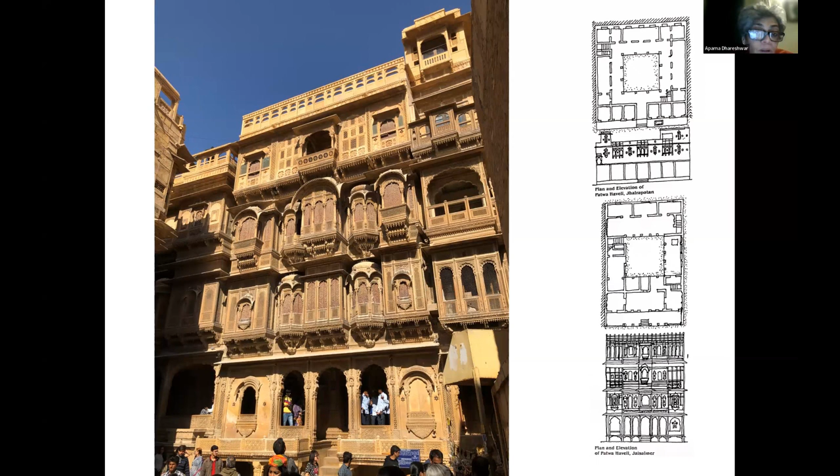And we borrowed very heavily from this historical prototype or archetype that is available to us. This is a diagrammatic representation of a Haveli, where, as you're able to see — Pedro, are you able to see my cursor? Yes, okay, that's perfect. Okay, so this is a typical plan, an evolution of a plan which we imagine might have developed.

Where you're looking at a rural house and how it went from coming together to forming a courtyard, a central space in the center of the house with all the rooms on the side, and how here you have a single courtyard and all the rooms along the edges, and how it develops into a slightly bigger mansion where you have multiple courtyards of varying scale. And this is a quintessential plan of a Haveli from centuries ago, perhaps.

And a lot of these Havelis still exist. To give you an image of how it might look, this is how a Haveli might look from a slightly higher level. These are, of course, addressing the issues of being in a geography where the temperatures are extremely hot. This is a desert region, so this is the general context of where the project was located. And we borrowed very heavily from this context.

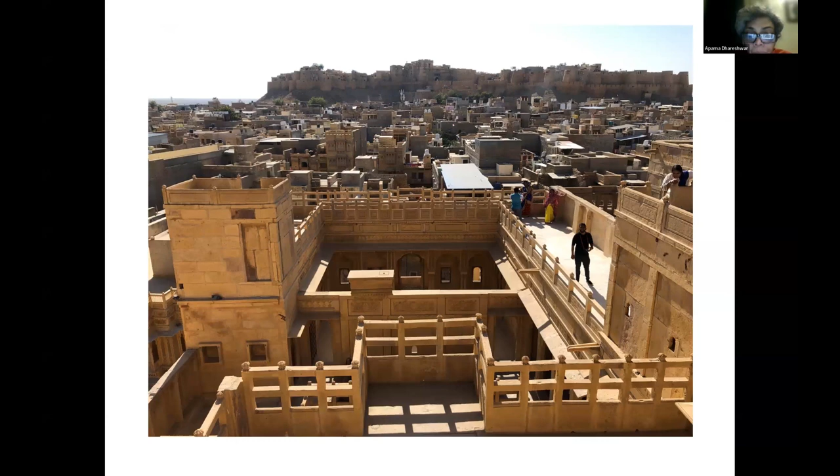The interesting part about the project was that it was not only student housing, it was also that the owners of the student hostel wanted to stay on the upper floors of this structure. So it was a hybrid program where you had slightly public program on the lower floors, and private residential levels at the upper.

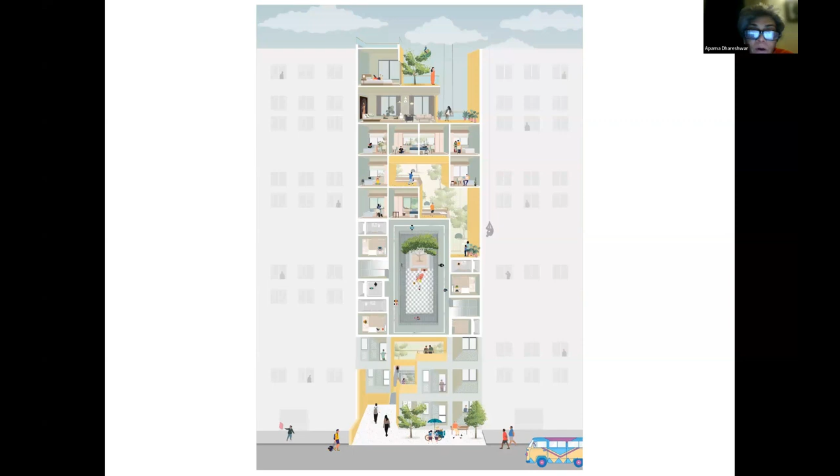So in a nutshell, this is the program: a mix of public housing, student housing, and private housing at the top. You're going to have two structures on either side of your land, and this is where you're going to squeeze in your program.

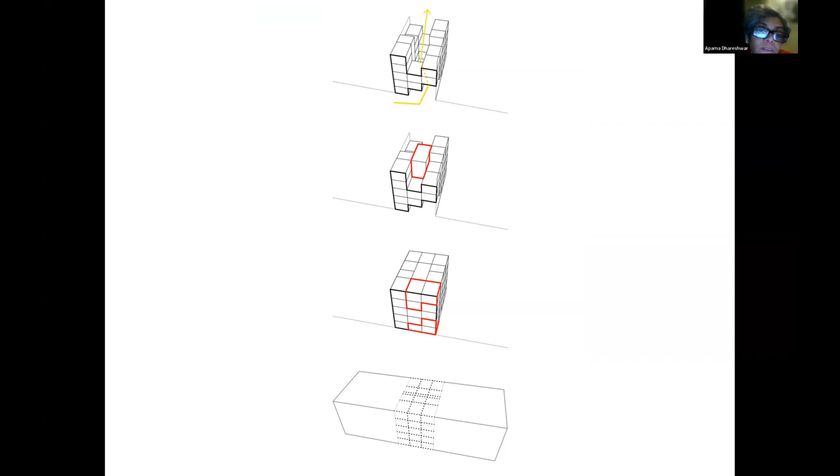So what we did was we said, okay, how can we scoop out the center and create multiple courtyards, making this structure a little breathable, a little porous. We scooped out these volumes that you see marked in red.

This is the section through the program that we eventually developed, where this is the roadside on the right. You enter the program here and come into this multi-level courtyard open to sky. You have all these rooms flanking the courtyard and looking into it. This is an open-to-sky courtyard.

What happens on the top two levels is the private residence of the owners. There's a little bit of a small basement here, slightly subterranean, so you have some trees growing in there.

So what we effectively created was, instead of having a structure open only on two sides of the land, we scooped out the center and allowed the rooms to breathe in from all sides. We basically created a typology where the student housing could have a courtyard right in the center, and not a block of building with no ventilation or light.

So this is basically the section. Natural light, ventilation, and social spaces were very critical for us to introduce into this project, because when there is a high risk of failure for the students, we felt the community could garner together and develop a sense of community, a sense of belonging, a sense of support. The architecture was primarily worked around that idea, how we can help build a community for the students staying so far away from their parents, under great pressure, studying 6 to 7, sometimes 12 to 14 hours a day.

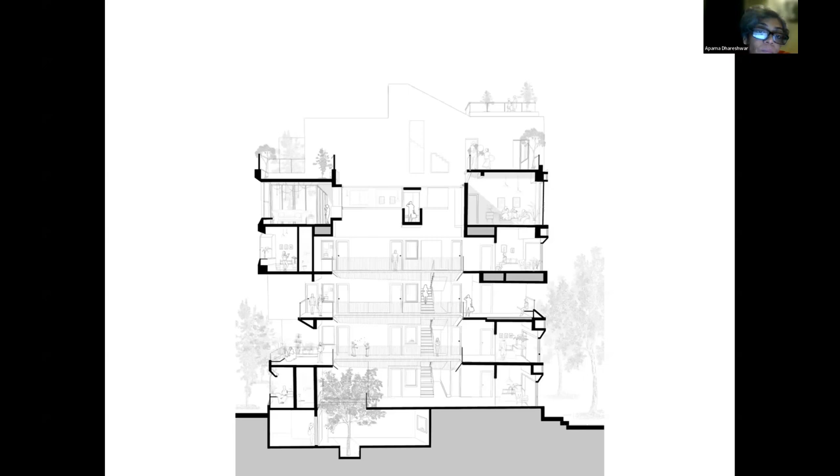The Kota Hostel is a small beginning in reimagining students living in the town away from their parents under pressure. These are the plans. You basically have the road on this side, and there would be a structure on this side.

When we completed the project, the structure on the left had not been done, but the structure on the right was already in place. So we began by building our own wall on the left-hand side and built this entire structure. But within a year or two, this structure will also come up, so one has to assume there will always be a blank wall here and here. From the road, you enter in here. This is your central courtyard, and these are all the rooms on the side.

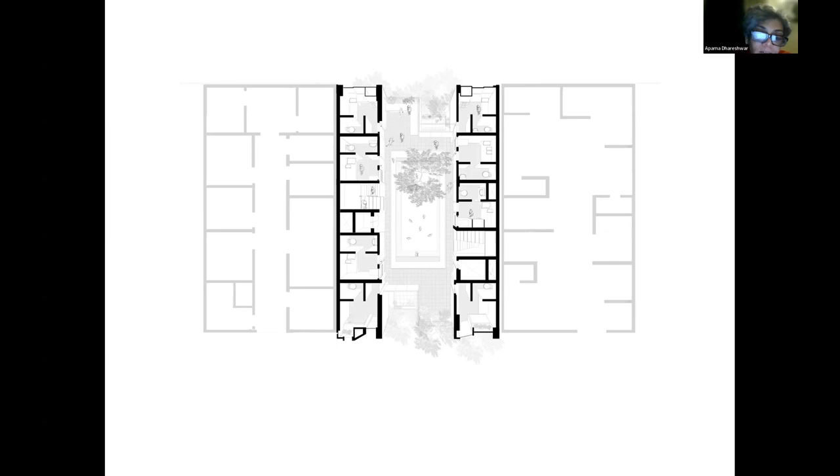This is on the upper floor. These are the rooms with their attached bathrooms and washrooms. They all look into the courtyard, so at any point in time there is huge visual connection between all the students. There are also cutouts that connect you vertically in the section, letting you look up and down, creating a great feeling of openness because of these multi-courtyards across the section.

We have also borrowed the materiality of stone and created these little facades, little jalis. They're called jalis in the local dialect. A jali is a screen, a perforated screen made out of stone, a very typical traditional vernacular ventilating tool. When air flows in through screens of stone, it naturally becomes cooler as it enters the room, so that's the element we picked up.

So these are all your hostels. You have levels 1, 2, 3, and 4, which are all your hostels, all your student rooms looking outside, and then you have the upper two floors which are owner-owned. These are some images of the project.

The use of color yellow is again borrowed from the local context, it's a very popular bright color, which we wanted because we wanted to create an environment that is bright, open, and airy. As you can see, there's a lot of light, but it will also allow a lot of air to circulate and hence cool the rooms.

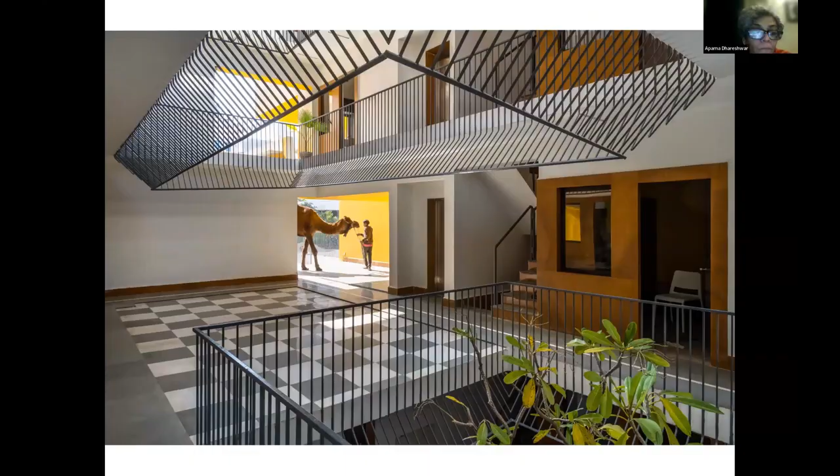Again, some views of the courtyard. This is the courtyard that is open to the sky. The bridge you see here is on the level belonging to the owners. The open-to-sky courtyard is spanned by this bridge, and it connects the two arms of the residential unit for the owners.

Just to conclude on Atam, the meaning of Atam is intimate. I don't know if there's a direct translation for that word, but it could also mean soul, like S-O-U-L, soul of a person. In this context, intimate is the correct meaning, and that's the name of the project.

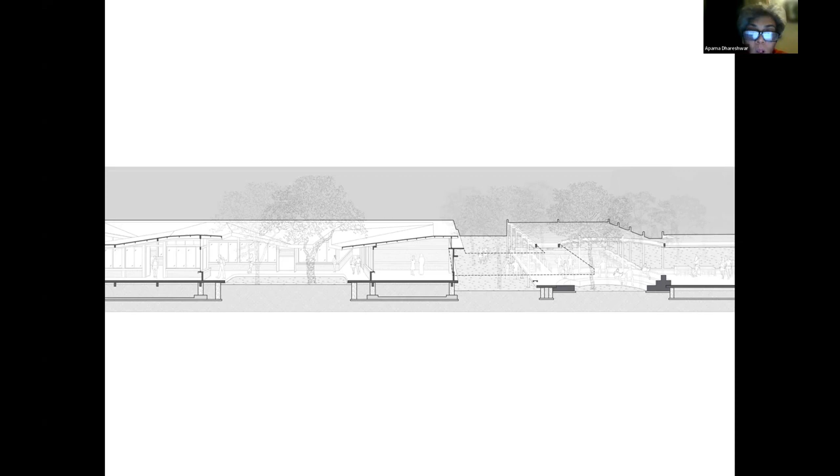So what happened was that there was barely any footprint of considerable scale that would allow us to make a food court or pavilion for them. So the next slide will show you how that is.

So what we did was we built around the trees. This was a big tree. The structure you see here is an existing tower on the campus, about a 6-7 storied building, I don't remember exactly how many levels. So this was an existing building, and there's a little one on the side which you can't see here, which we had built as an extension. And this was the third structure that was going to come in.

So the dining pavilion connected the tall tower along to the labs, which you can't see currently in this picture. But it was a pavilion, so it was an open structure. The whole idea was to make it very light, a space conducive to the children coming in, eating their food, taking a break. At the same time, give them shade, make sure there's enough light, protect them from rain, and allow for spaces where they could congregate and have events. Again, you might find a common theme that we always have this central courtyard or congregational space for people to connect and bond over.

This is designed in a locality of Mumbai called Sion. The student dining pavilion is basically a partially open space. It exists as an extension to the indoor cafeteria, which is where, if you can see my cursor, that is the extension. It is designed with primarily three objectives in mind. One, it serves as a dining area. Second, it creates a physical link between the site's existing building. And it was also to contain a brick amphitheater.

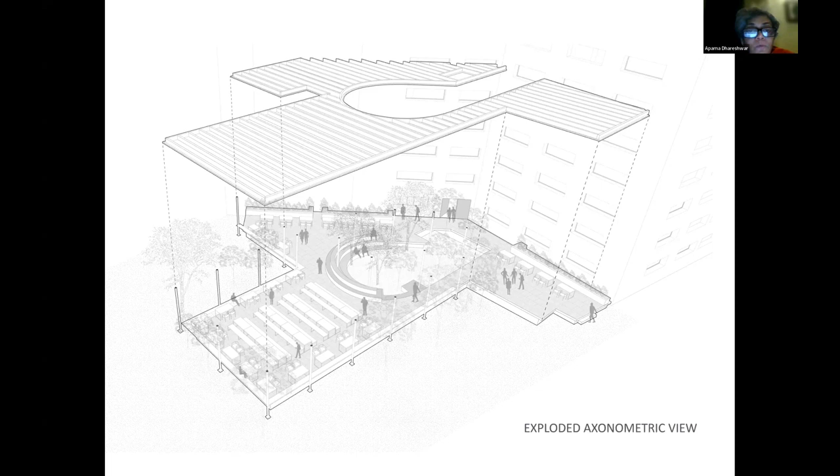So this brick amphitheater that you see in the center was created for informal gatherings. The central structural or architectural pin that holds the whole project together, if I had to pinpoint, would be the structure of the pavilion. So you have this beam structure held in place by peripheral circular columns.

So this is a view. The entire pavilion is held together by these circular light steel columns. What we did was use that structure to build our seating, so the cantilever fixed seat is fixed to these columns. The column also serves the purpose of holding light, so your uplighters and downlighters are fixed here. The beam naturally also holds the roof.

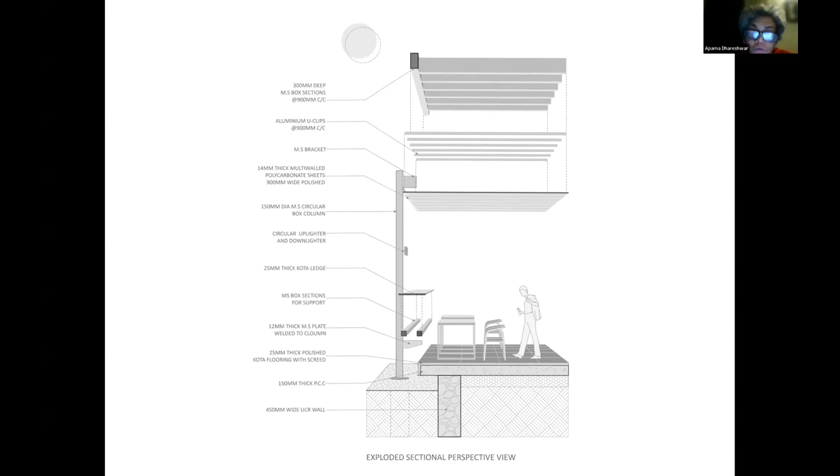So this column is the central feature that holds the whole project together, where the seating is fixed to the column, the lights are fixed to the column, the roof is fixed to the column, and there is an extent - it's slightly off the plinth, the plate that holds the pavilion. So there's a disconnect between the structure which wraps the entire plinth that is weaving primarily between the trees, which you will see in the following slides.

So this is the column I was talking about. You have an entire array of steel circular columns around. There is a beam here which holds the roof. There's this light polycarbonate roof that floats over this plinth, and this plinth is primarily weaving around all the existing trees on site. So in a nutshell, this is how we envisaged the project - the trees guided us in terms of how we want the pavilion to be, and the roof and footprint of this pavilion is completely contextual to this site.

This is the brick amphitheater that you see in the center here. This floor plane is a continuous platform, and here, this is an overhead - you see this translucent canopy supported by these slim circular columns. And like I said, the lighting you can see here is integrated, it's part of the structure.

The roof plane - we purposely put the structure on top of the polycarbonate, so when you're sitting down, you're not really seeing the beams running across. They're not very loud, so it gives an appearance of the polycarbonate kind of floating over your head. And it's a pretty surreal experience because of the trees - the shadows are always shifting. The way the roof is envisaged is always changing at different times of the day because of the light and shadow play.

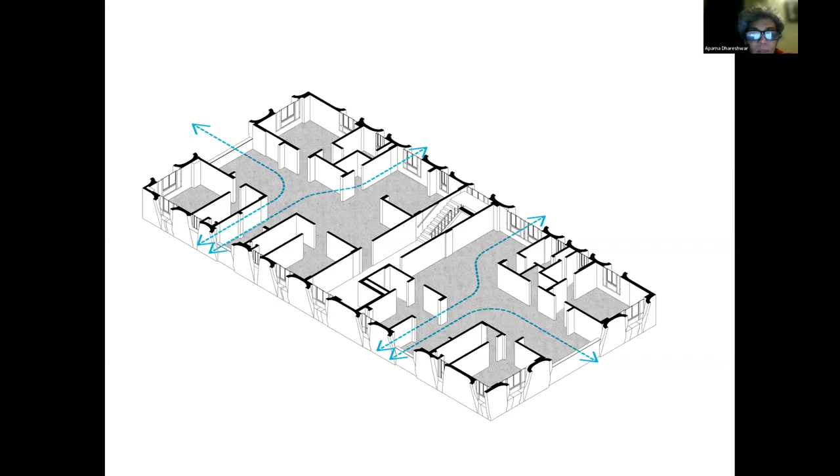This is another view of the plan. You enter here and there's a central hallway which leads to two apartments on each floor. As you can see, we punctuated the apartments with these two balconies - two punctures on each side. And you can see a lot of windows along this facade because the views around were so interesting.

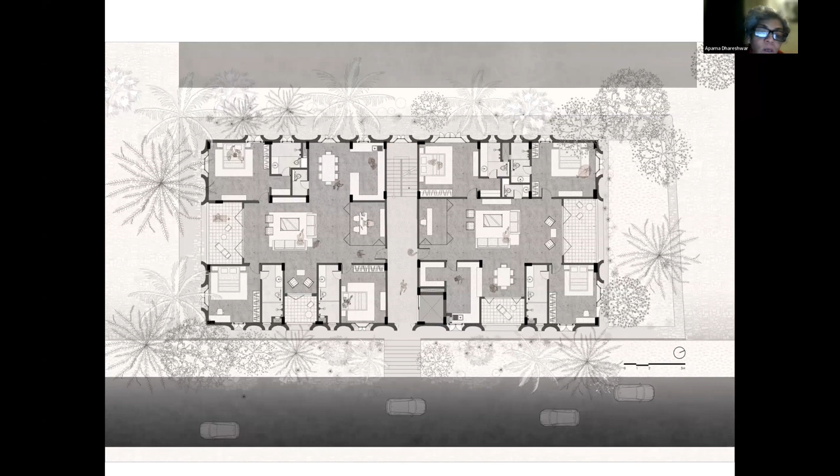Pedro, I hope you can see the GIF.

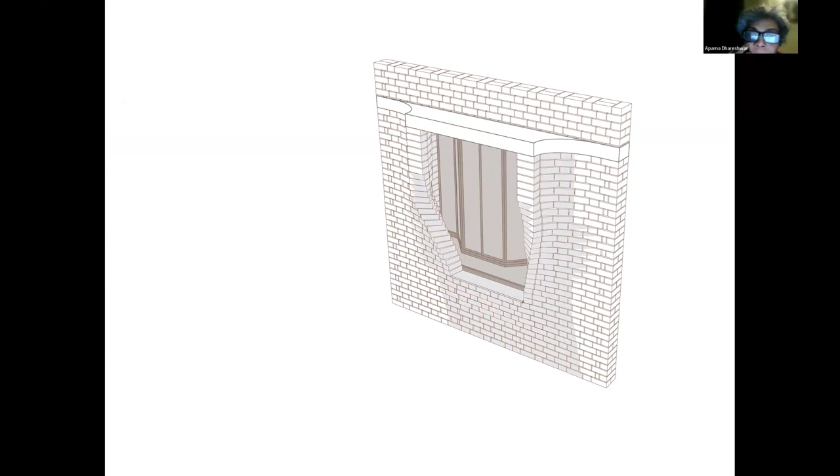So the second point of intervention was the building skin, which comprises walls and horizontal sun protection, because it's again a very hot city. Working with master brick masons from Pondicherry, a city in the south of India, we designed a wall system made from 9-inch thick brick walls that corbelled to carry the load of these stone-faced lintels, or chhajjas as they're called in the local dialect.

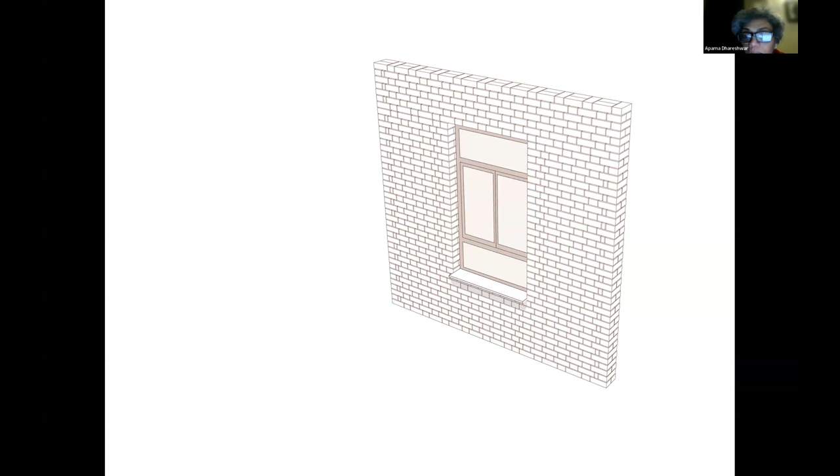Glass bay windows are recessed, set into the opening, so they give you shade. At the same time, we're looking at how the cantilevered stone-faced lintels can add a formal accent to all the windows.

These were the different modules. We work a lot with scripting and do a lot of parametric modeling. We use Rhino as our main software, with plugins, and worked on a lot of components to create these modules.

As you can see, this is the formal development of the windows - this is the sunshade, this is the glass. We corbelled the edges of the fenestrations to give it more form. We worked on the fenestrations primarily, formally, because that was the only intervention we could make for the project.

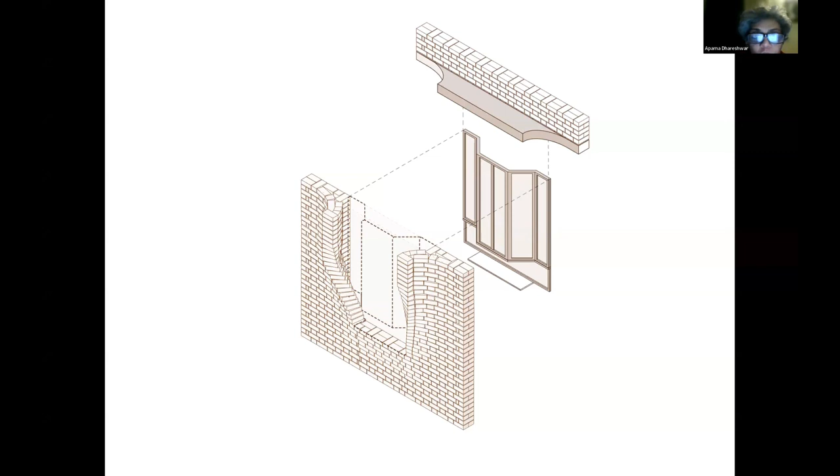To ensure the structural integrity of the wall corbelling, we designed these wooden templates. The way each brick was twisted was designed by working with the masons, and we made these molds which were then used by the brick masons to lay the courses of bricks.

We do a lot of this collaboration where we are keen to learn and work with craftsmen, with people who are actually working with their hands, while reinforcing that craft with cutting-edge technology in terms of software and structural analysis. It's a fantastic combination of using the craft and intelligence of your craftsmen, your existing resources, along with the latest technological tools in your studio. This project is a perfect symphony, an example of something like that.

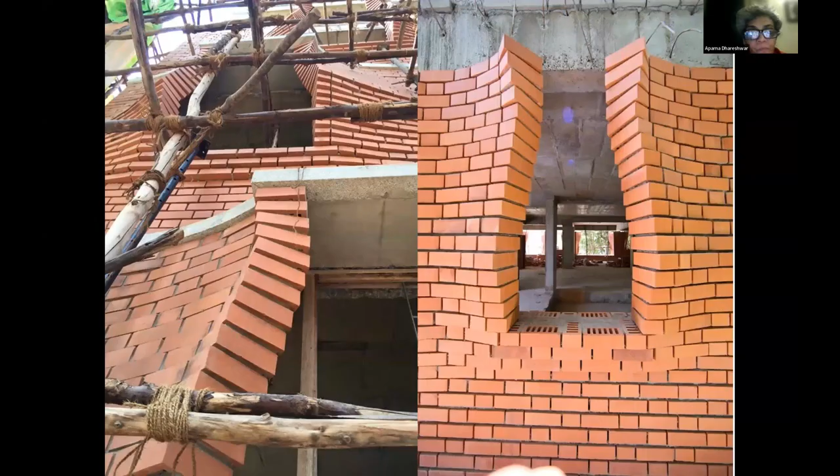These are construction pictures, and you can see how the molds might have been used to create these sort of edges for all the openings. And this is the finished building facade.

The project is called Sienna, naturally, because of the color of the brick. We've taken the name from the color of the materiality that we are using. So this is Sienna.

We move to the next project. This was a factory project that we had been commissioned to do, again in an extremely hot site environment where the site was completely surrounded by these metal sheds, metal warehouses, very opaque, heat reflecting, light reflecting context around on all sides of the site.

We were really looking to see what we could introduce in the project that would help break that opacity, the harshness, the materiality, the almost characterless site context that was existing on the site. The project was a factory. I will run you through more about it in the consecutive slides.

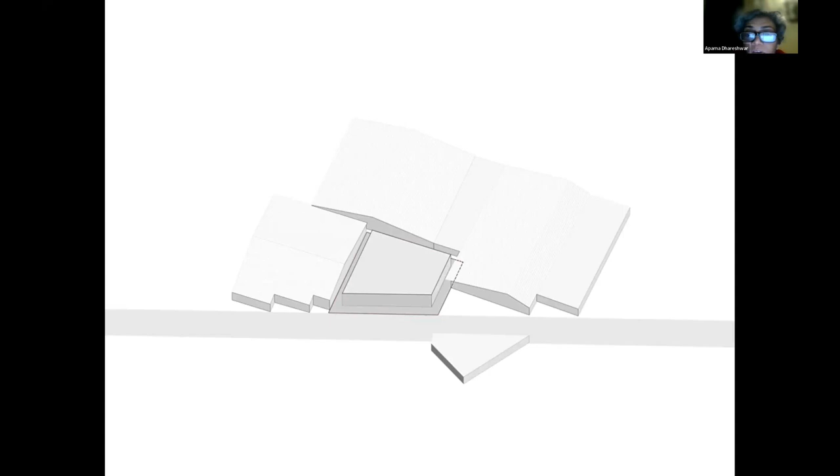It had a slight irregularity, it was not a perfect rectangle. This is the road, the approach. Rather than its surrounding structures which were opaque and created this really hard edge with the passing road, the endeavor was to enter into a more open dialogue with the context, and we created that by opening the concrete facade.

You see in this view that it's like a concrete block, and we opened this building by taking out some of the mass and opening it out to the road. You will get a better idea in the following slides.

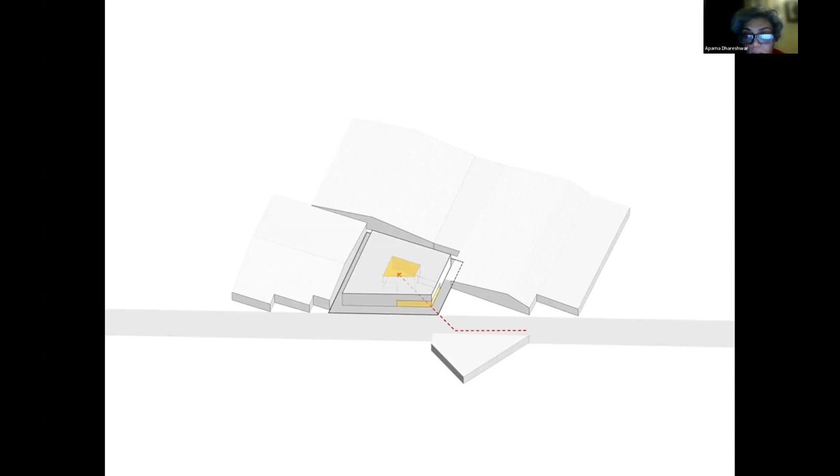So this is the concrete mass that we did, this was a massing exercise. What we did was we scooped out this entry part and opened out the building from the inside, looking out onto the road. We opened out this corner, opened out the center.

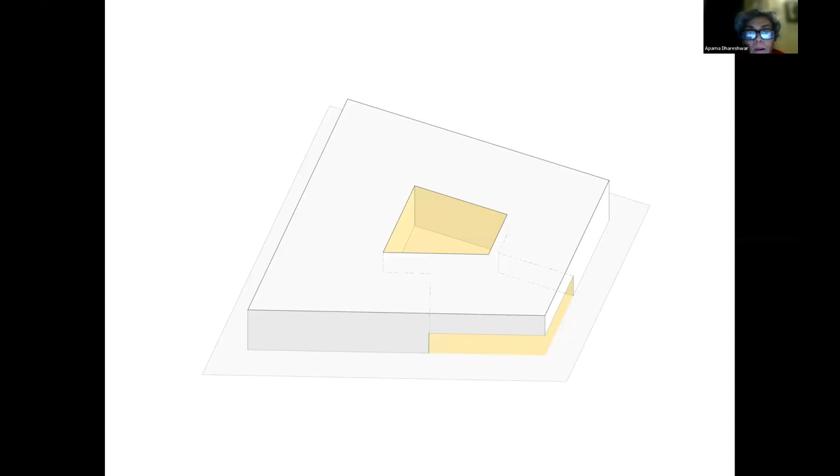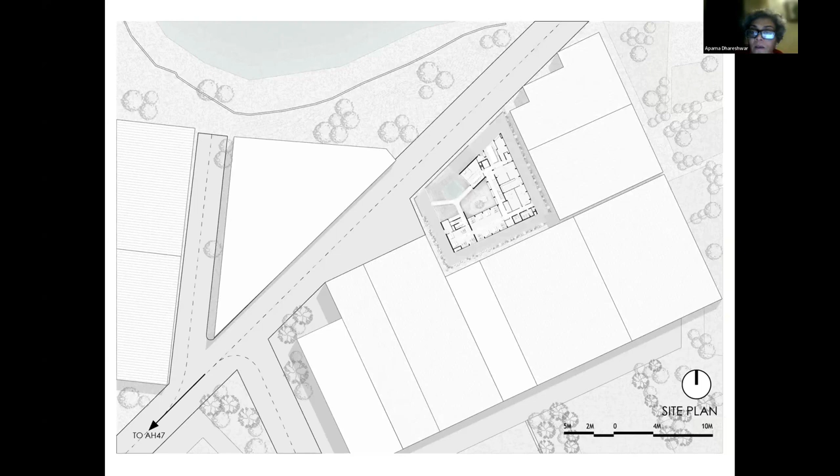It flanks the central courtyard, and we literally took out this corner from the massing. This is a more zoomed in view of the ground floor plan.

So this is the road. You approach, you get into the building from this bridge. What we did was we scooped out this land from there. There was already a contoured land, so this was its lowest point.

So we built in a reservoir, like a pond, here, and introduced some landscape element, connected it to this courtyard, which was a spill out for the people working in here.

So you entered in from here. There was admin, there were all these administrative offices, facilities here for the workers. This was their equipment, their machine rooms. This was also a factory here. This is all on the ground floor, so it spills out at this level.

And you could also, if you want to take a break, go down these steps where this body of water had been created. I will talk more about this part in the consecutive slides.

So this is your first level, which is at ground level. This is your upper floor, which looks into the courtyard here. And you have a terrace, which is the roof of the lower floor, again looking into the courtyard. At the same time, you're opening out the views from this arm, which was a completely glazed window through which you could look out.

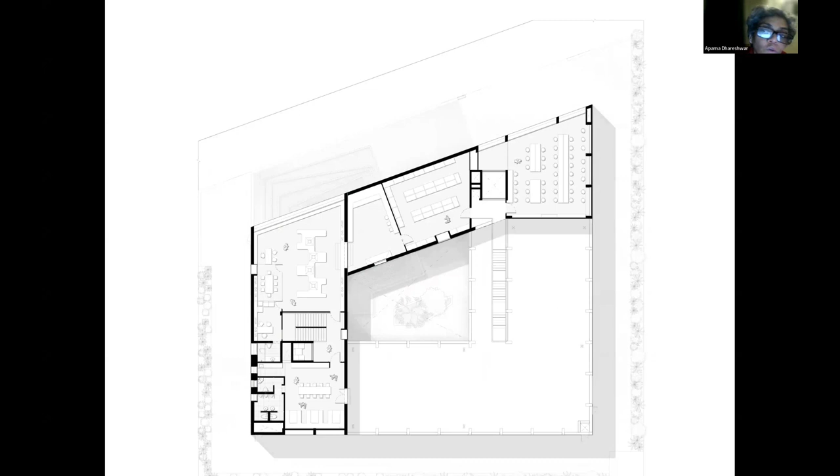From the ground level, you could go down to the naturally contoured lowest level on site that we already had. When we initially went to see the site, this was actually filled with water, and this little pond was used to wash buffaloes roaming around the area. It was really like a bathtub for the cattle. So we retained that contour, and said we'd still try to see what we could do through rainwater harvesting or collecting water, and we left that pit on site and built around it.

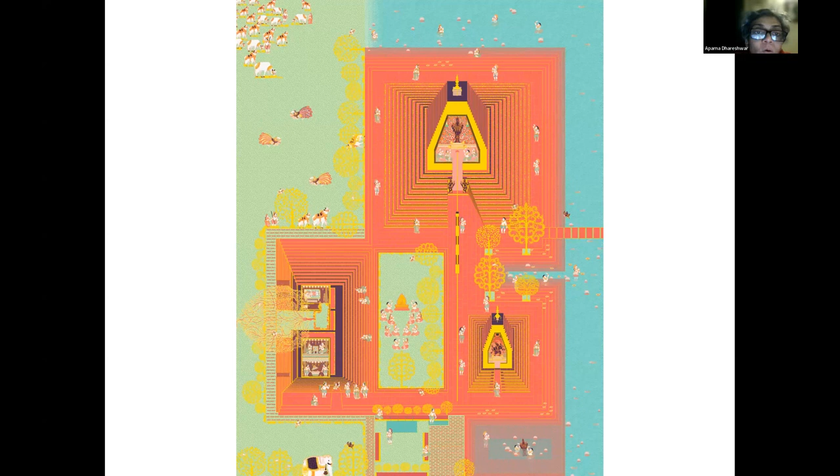This is a miniature prepared in the same artistic style of the local textiles and local art created in these villages. And in that same style, this is a representation of the project, where these are the two shrines that you see, and this is all water around that.

And this is a small enclave for the priests and for the kitchen. Then there are these smaller ponds, and a little bit of greenery around here. So this is just a representation done by our design team, carrying forward the art that is available in Nandyal.

The brief was to design a temple for the residents of the villages in an extremely dry terrain of Nandyal. So the main concern was to provide a space which would marry the socio-cultural expectations of a temple with the ecological framework and dynamics of the site.

The negotiation of land and water with steps is a significant part of India's architectural heritage, as seen in the ghats of the city of Banaras. I'll show you what ghats mean. The planning of the temple itself was based on a 10th century temple of the same deity, called Tirupati, so there were very strict guidelines given to us, laid out by the priest who would be part of the temple complex.

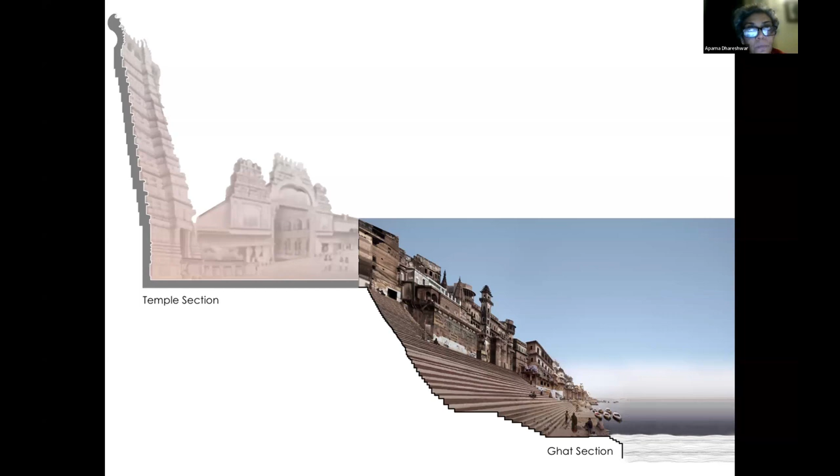So though we don't have a river, we're going to reimagine the temple that is typically set on riverbanks. That was our strategy. These are the initial sketches we were looking at.

Kund is the local term for this negotiation of land and water, where steps keep going underground and become a reservoir. They hold the water, but the same form continues to become the steps. This is a very typical Indian architectural feature called kund. So we said we'd have a kund on either side of the temple, with the temple almost rising out of the ground. That was our basic idea.

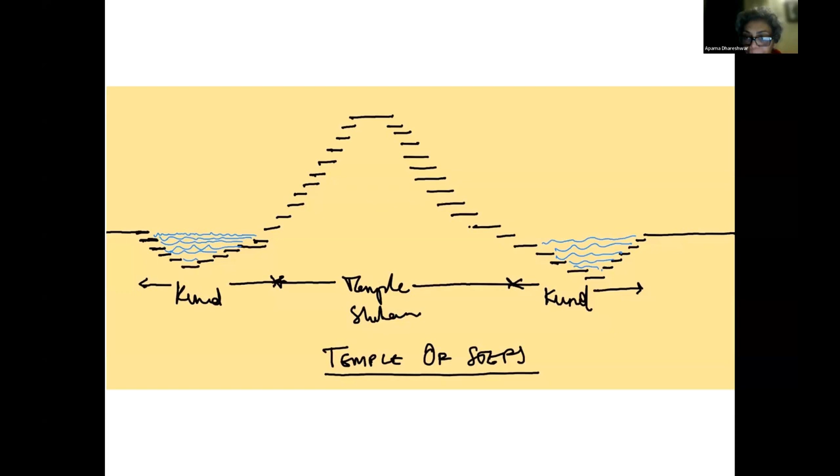It's not just people sitting on the computer imagining it through digital models. We also do physical modeling with paper, wood, and different kinds of materials, even concrete models. A variety of materials are used, and that's an important part of our design development.

These ghats or this kund that you're looking at, we imagine this was a central idea to this project. We imagined that these flight of steps leading down to the water body would be abuzz with people who would use it for their bathing traditionally, washing their feet, washing their hands, cleansing themselves. So water is a very important element when you're visiting the temple.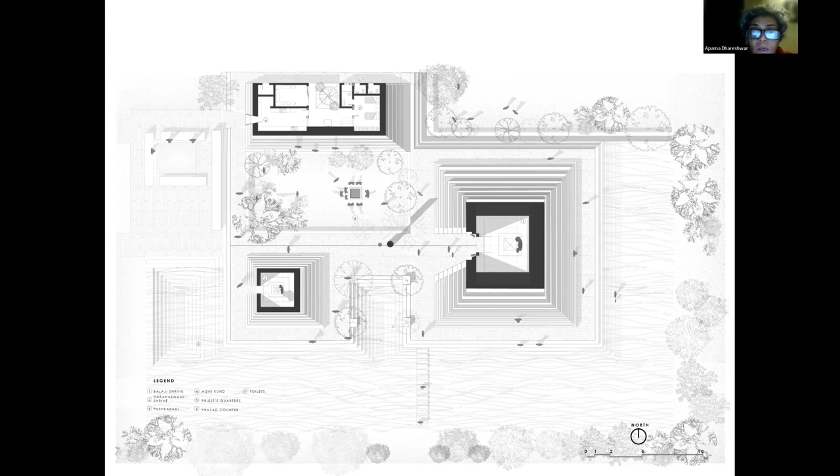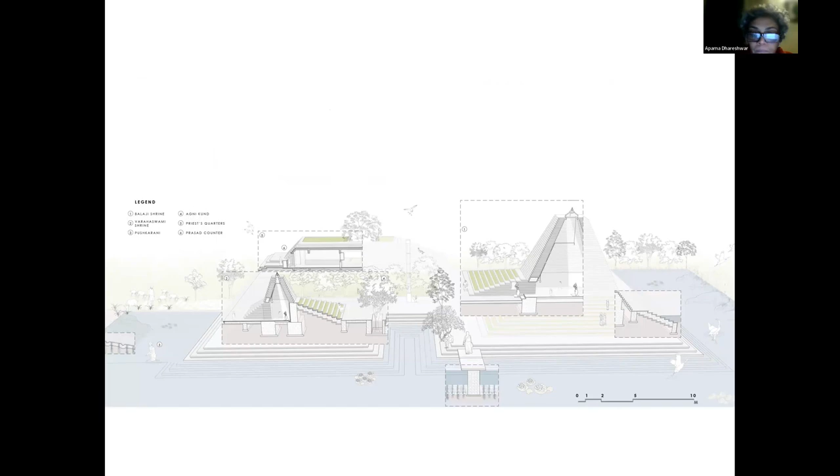This is a bird's eye view of the built project. This is the main shrine. This is the water body that you see on the side, created with the wastewater. This is again a space left open for the villagers. Many times they have functions where they need holy fires around which people will sit and perform religious rituals. So we've given them a space for this.

This is the smaller shrine, and under these flight of steps is housed the kitchen and the priest's residence. The cement plant, which financed this for all the villages in the vicinity, is here in the background. You can see there is a village out here, and a village out here. This is the main road that connects them. So they all drive in from these roads, and this is like a driveway. As you're approaching, you're always seeing the shrine at the end of that road.

This is an east-west axis. This is the pond that we built. This is the smaller shrine, and this is the priest and kitchen's enclave. More pictures of the same.

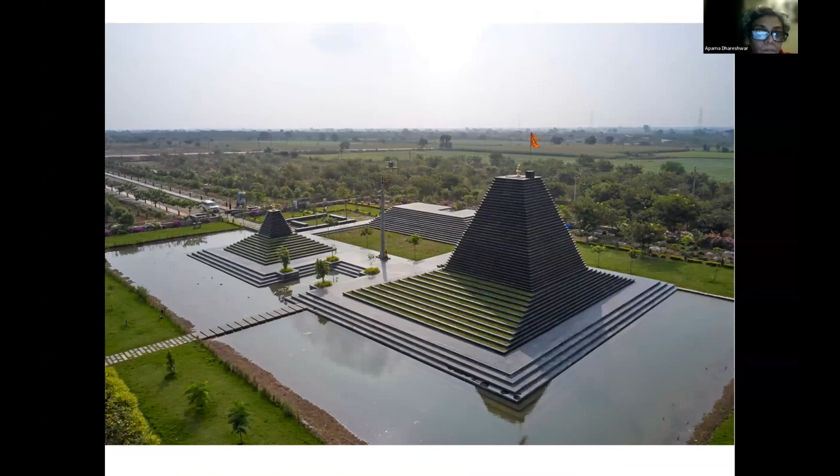This is an Indian priest. Typically you will have women decorating the shrine. This is black limestone, local limestone that we used. So we just basically corbelled the stones to create the temple.

This is when you're coming from the east-west axis that I showed you in the previous slide. This is what you would see.

So this is the central idea of the project, where we are negotiating land and water with steps. If I had to sum up the project, it would be this: how do you negotiate water and land. This is part of India's architectural heritage, as seen in the pictures I showed you in the previous slide.

These are the deities inside, and you can see there is a skylight here which throws light on the deities. So this is one temple project.

I'm going to move to the next project, which is called Maya Somaiya Library. It was a library for children.

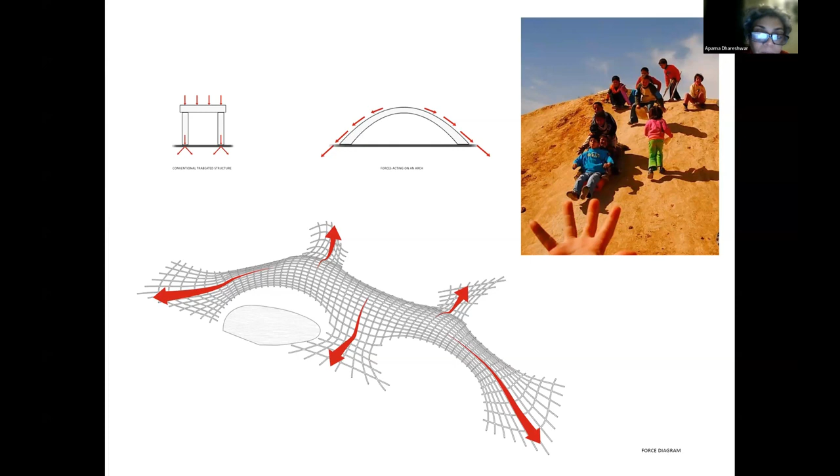We thought we could use brick as a material for its tactility and availability, and also as insulation against the strong sun. So this was the basic idea: the ground itself extends formally as landscape and basically houses the library.

These are the first couple of images we were looking at when we started developing the landscape. On the first site visit, it was interesting because they already had some geodesic structures built as part of the school buildings. So we were keen that the users were open to a different formal development on the site, since the rest of the buildings were completely rectangular and cuboid. We had no hesitation in taking the ground itself to become like a landscape form.

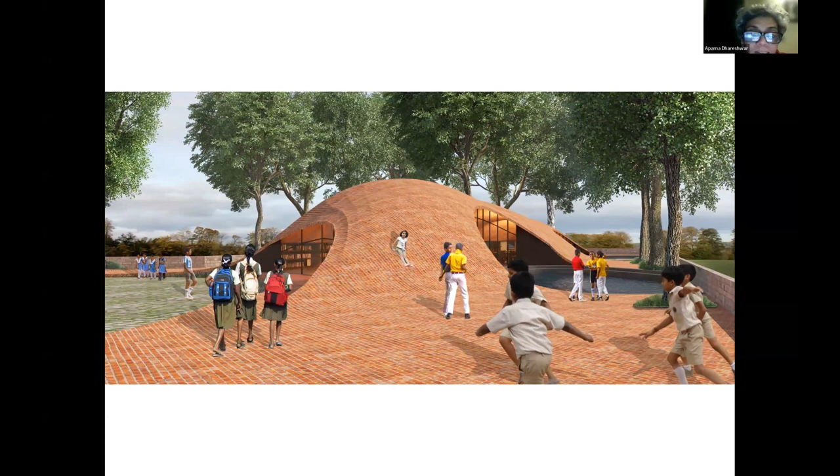The construction technology of the project is also very central to it. We were looking at the regional and local context, how we could use the material efficiencies of brick, how we could use the embedded labor practices still present in the country, and how we could efficiently build with brick to leverage the form. We used a hybrid of principles ranging from Catalan tile vaulting to the compression ring detail from the work of Eladio Dieste.

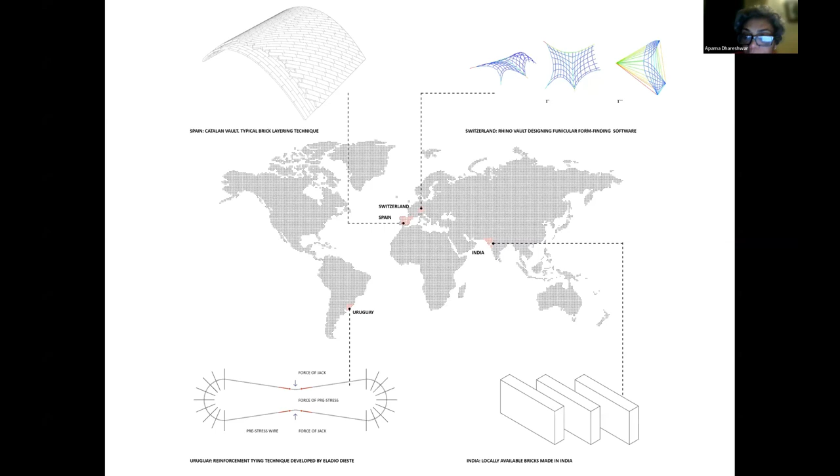I don't know if students in the audience know about him, but it would be great if they could Google Dieste's work. Combining the ideas of Catalan tile vaulting and the compression system, we used Rhino Vault plugins to design the entire vault. I will show you in the next couple of slides how that works.

This is a detail of how we had the vault touch the ground. The entire structure is a series of vaults which meet the ground only at 5 points. It literally just rests delicately on these 5 points. This is a detail of that.

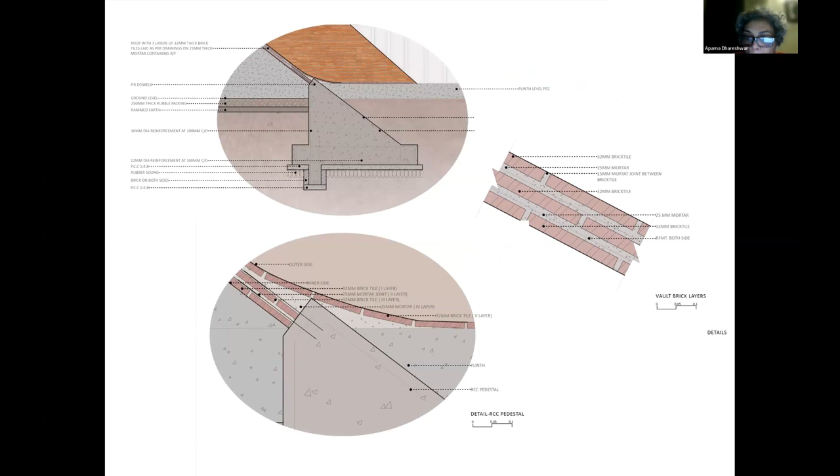This is the plan of the site. These were all existing buildings which had classrooms. And what they gave us was this really little piece of land which had no presence at all. This was the bit of land that they said, okay, build a library here.

As you see, if you come in from here, this is the approach into the school complex. There is no way you can even see the library, because there are buildings here, here, here, and here. So literally this is a leftover sliver of land that they left for us in the corner, a little piece of land, and that's all that we had.

So the vault responds to the site that is available to us and spreads itself organically here. And like I said, it meets the ground in about 5 points and rises up.

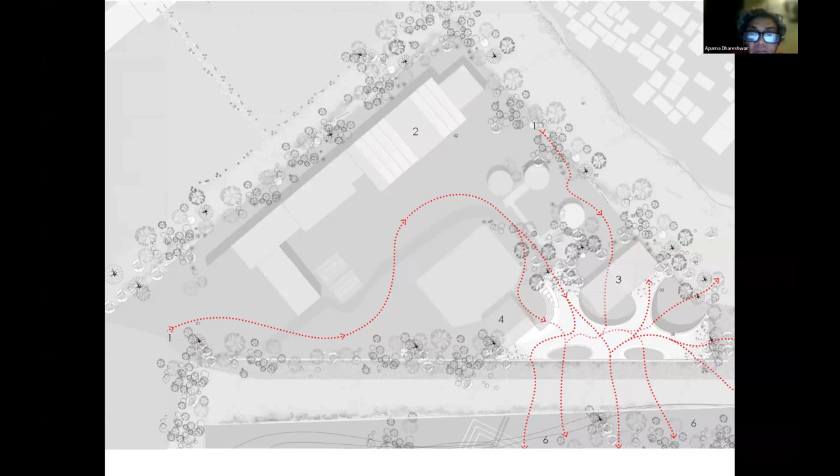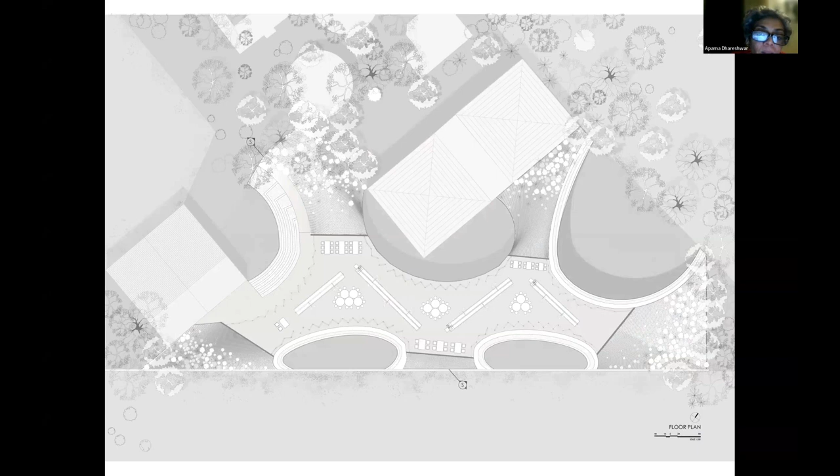This is a slightly zoomed in picture of the plan. So at the plan level, at the ground level, you see how the furniture is kind of responding to the shape of the form of the vault. And we have books arranged everywhere. These are also furniture pieces which hold books.

This is the section. This is how the vault comes and meets the ground. And I was talking about how you have children of different ages and sizes coming in here. So the section works beautifully because we've seen tiny children wanting to go and snuggle into these little spaces right under the vault and reading, and the older ones sticking to the benches and chairs and the conventional methods of reading books.

So the vault in that sense allowed for even the smallest child to feel secure to take a book and snuggle into it, almost as if, the way they go and sit under the tables. So this kind of mimicked that sort of feeling in the section.

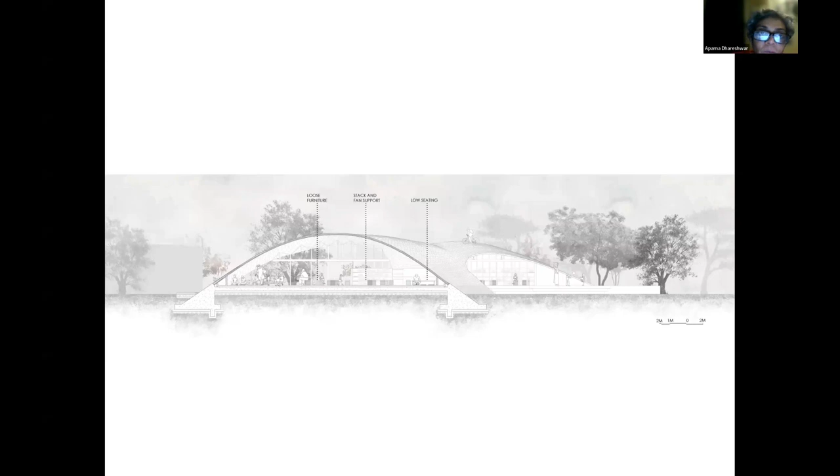You can see this thin, almost about 4 inches. I don't think it was, I think it was totally even less than 100 mm in thickness, the final vault.

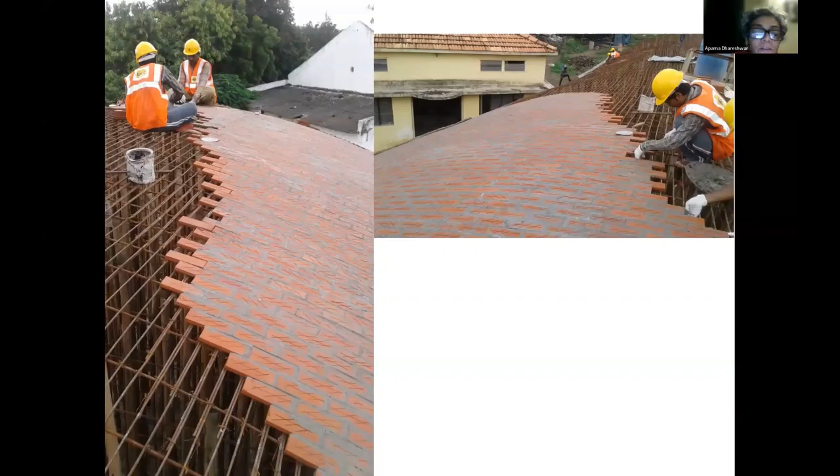These are pictures of construction. This is the formwork. This is the finished vault.

And you can, of course, climb it, children can walk over it, anybody could walk over it.

This is the proximity of the existing building. So you might get a sense of what I was saying about having to squeeze in the building into the leftover part, it's literally responding to what land was made available to us.

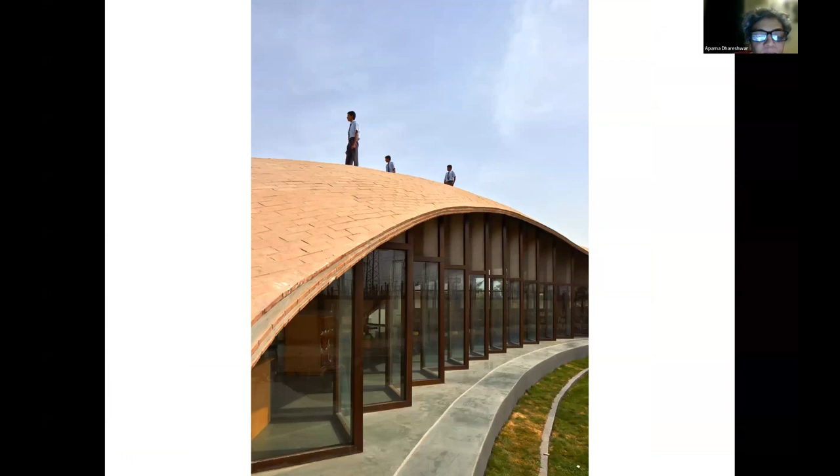You can see the 3 layers of bricks that were sandwiched to make the skin here.

We have avoided puncturing the vault at all. So you do not see any light fixture on the vault. There are no fans, no lights hanging from the roof or ceiling. Everything is taken from the floor because we didn't want to touch this at all.

Yeah, so that was the library. The next project is Jetavan, again in a site very close to the library. Jetavan in Buddhist mythology means a sacred grove of trees, where the Buddha gave the majority of his teachings. So whenever he would move from village to village, typically they would have his meetings in these groves of trees. So Jetavan actually means a grove of trees. That is the name of the project.

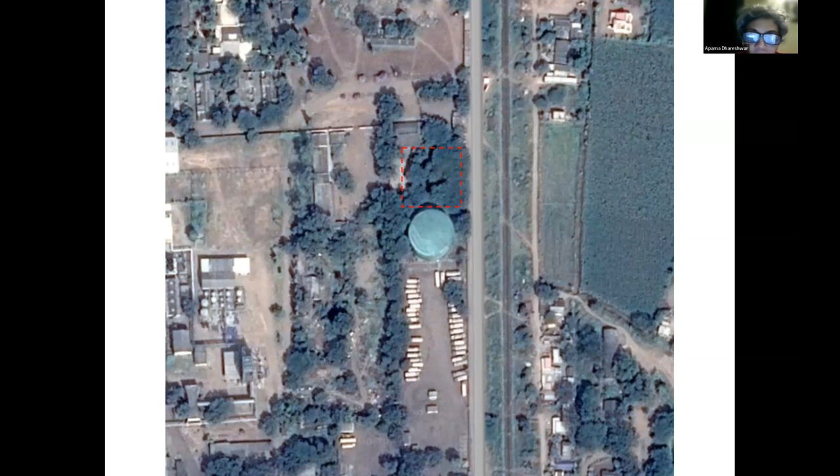But again, even as in the other previous project, we said no, we do not want to take the trees off, and we will build around it. And I think we were pretty successful in doing that.

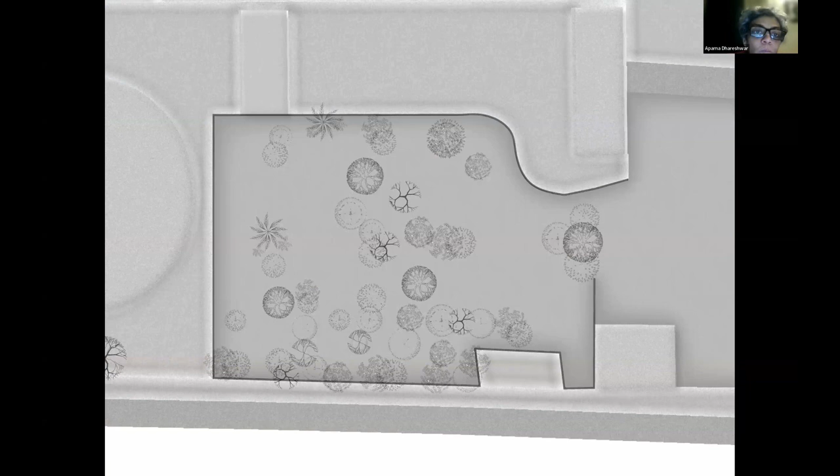There was also a railway line close by. So this is the site plan, and you can see the trees that are there, and there is hardly any footprint available to have a contiguous built structure.

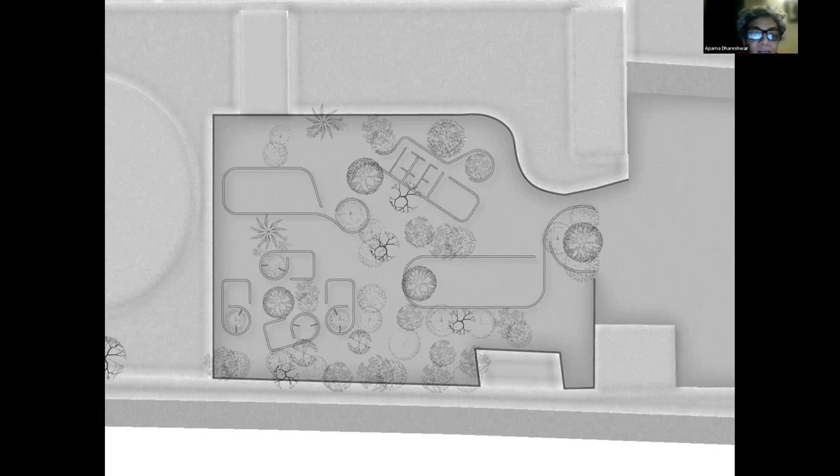They needed a meditation hall, residential services and facilities, administrative needs, and catering facilities. So all these are the initial doodles and the plans.

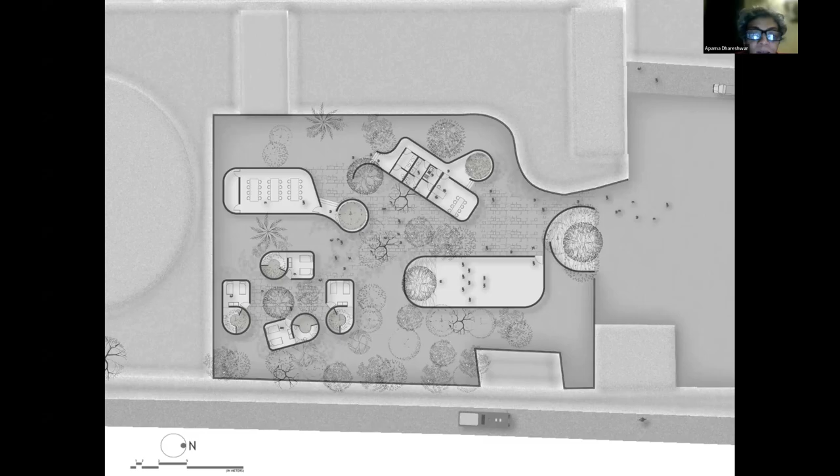Buddhist iconography is very, very strong, so initially we were very influenced by the form of the stupa. This is the stupa, so we were very, very influenced by that, and our initial doodles are all based on that sort of form.

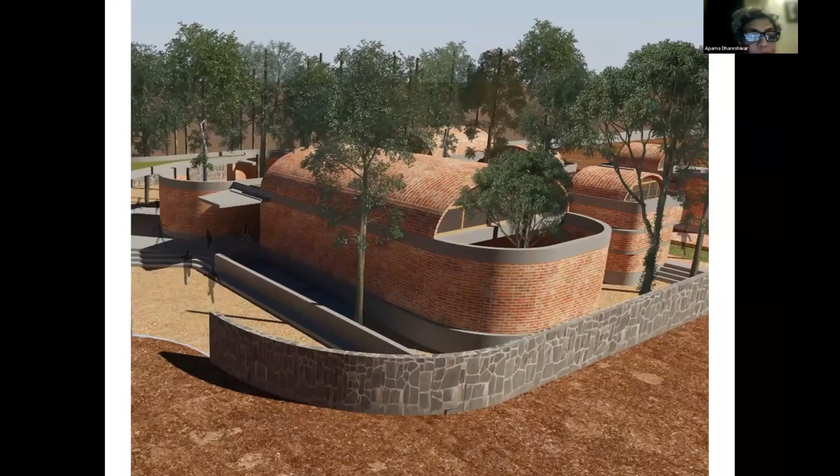And the reason why I'm showing you these images is because you will realize that the final project looks nothing like this.

And that's how, as an architectural studio, you kind of invest a lot in a particular idea and it seems to work. But we've never hesitated to say no even after spending 3 months on it, if something doesn't seem right. We go back, interrogate ourselves, question ourselves, and we're happy to start from square one. We have never compromised on a project idea just because we felt we spent so much time on it. If we think the project hasn't been addressed the way it should be, we are happy to throw all the old drawings out and start again at any point in time.

That's pretty much it—while the basic ideas stayed the same, the formal development changed, and I will show you how.

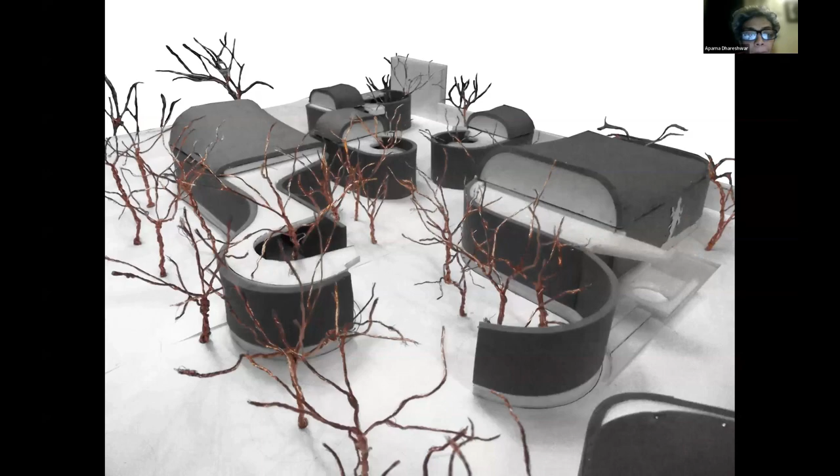So these are, again, like I said, the physical models that we are constantly doing. An interesting thing happened. We finished the project, finished the design documentation, and had done all the drawings. The first step typically is to do a line out on site.

I don't know how it is done in your country, but what we typically do is once we've got our plans in, we go on site and use this line powder—it's almost like chalk powder that is laid on site. And these sites, let me remind you, are not in your developed cities. They are very far away from metro centers. You're working with people with limited resources, and you don't have the most skilled labor available.

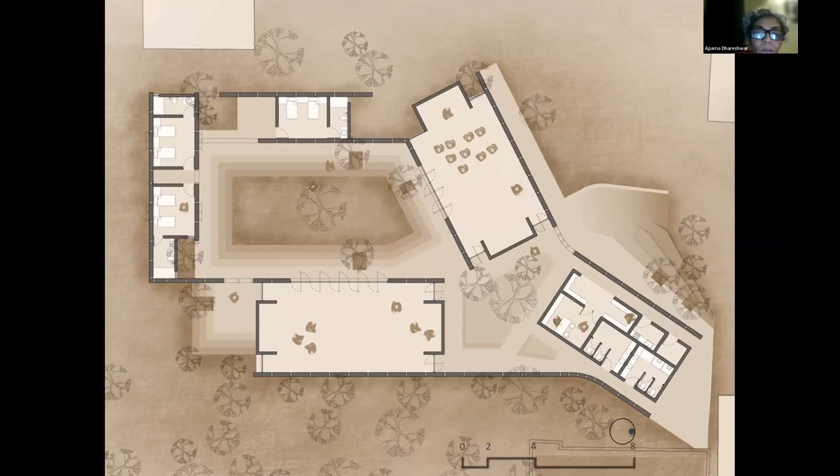This was for the villagers, so it was a very collaborative effort. We would have meetings in the evenings with them. The children were curious to see the plans and would draw over it and talk to us about it. It was a very interesting experience.

We then decided to collaborate with a team of craftsmen called Hunarshala, and the materials and construction of this project were developed in collaboration not just with local villagers but with this group. Hunar means craft and Shala means school, so the school of craft. These people are based in the western part of India, and they collaborated with us to build this project.

Hunarshala is based in Gujarat, and their work centers on the revival of local knowledge, local technologies and skills, working with communities and simple people who have the talent and capacity to shape their own habitats with their own methods—essentially vernacular building. Through their collaboration we used old and new techniques and materials to create this assemblage of traditional and modern building.

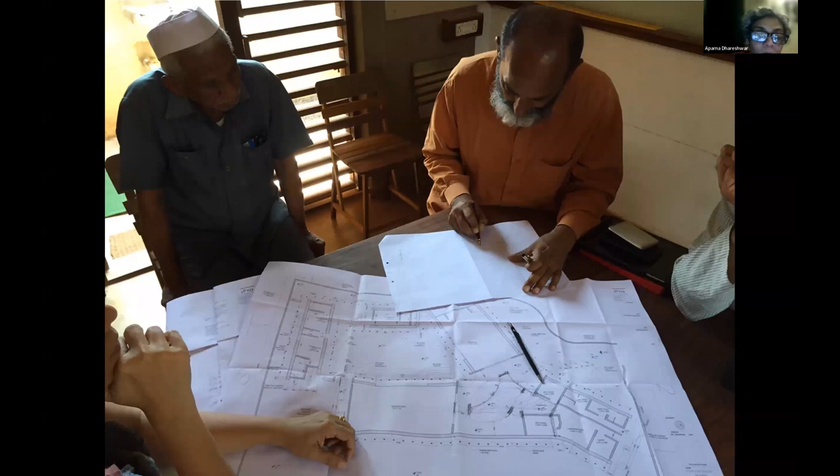These are meetings we had with Hunarshala, and sketches from when we were on site trying to figure out how to navigate the plan around the trees. These are details showing how we planned to avoid the trees.

We were looking for earth and clay, any material that could be locally sourced. It became a bricolage of locally sourced and recycled materials, made with what was on hand using existing construction methods. The walls were load-bearing rammed walls, a composite of basalt stone dust, which was waste from a quarry about 13 kilometers from the site. The waste was so difficult to remove that the quarry owners were actually paying people to take the dust away.

So we picked that up and did testing to see if we could use the quarry waste, the stone dust. With Hunarshala, the people I showed in the previous slide, we tried different combinations of the stone dust with fly ash.

Fly ash was a byproduct from the sugar factory that I showed you in the initial site. We used fly ash, basalt stone dust, and a bit of cement as a stabilizer, and made blocks out of those. We decided after successful experiments that they would be our wall material.

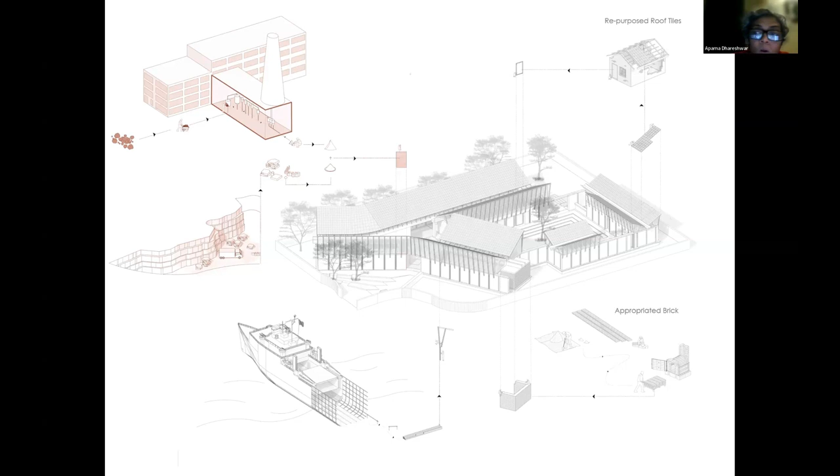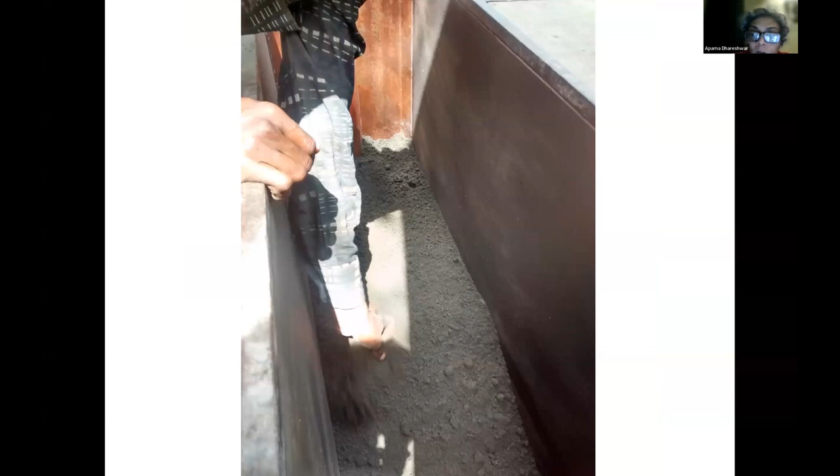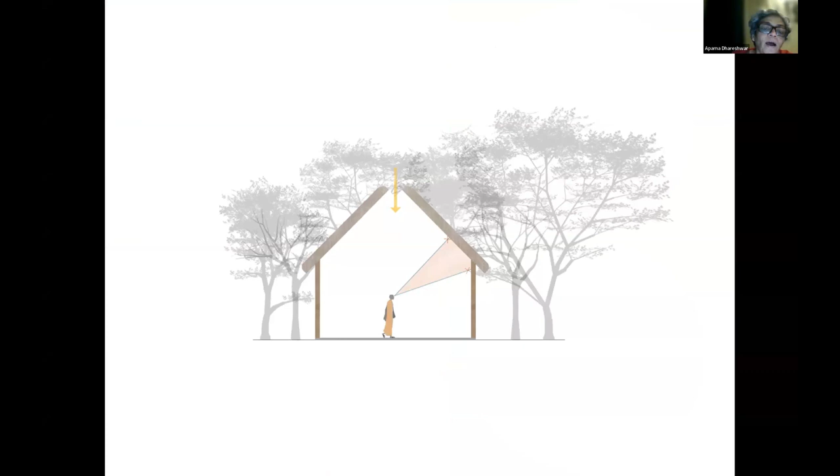This is what happened to the section after we had lunch in that place the other day, where we said, what if this would be your typical section where you're in the hall, and what you're seeing when walking or sitting is literally the roof and the wall. What if we inverted the roof—would it change things? Given the grove of trees around, would it completely change the sectional and spatial experience in that space? That was the thinking we were exploring.

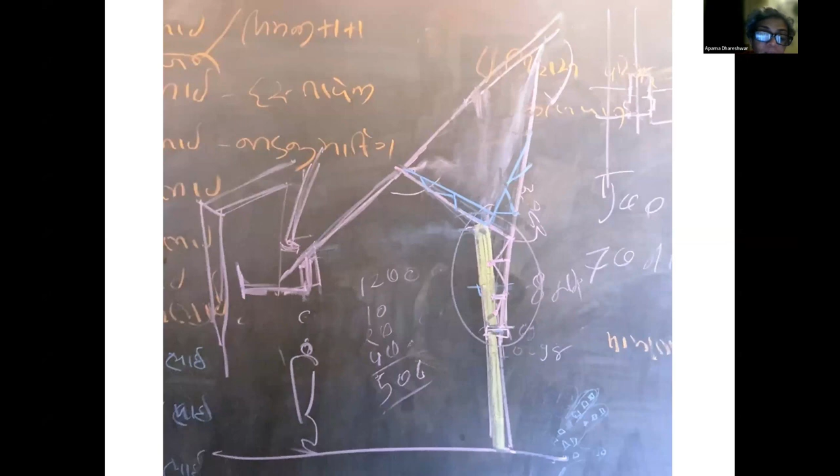I would often travel to Hunarshala, who's based in another part of the country, and I would be there with them, and our team would be there with them, discussing the wooden trusses and the roof construction. These are all drawings we worked on with them.

This is how the roof was then envisaged. The roof profile was inverted—we said we will get a central valley, this central gutter in which the water will run off, and then it will flow through this gutter and we will rain harvest it.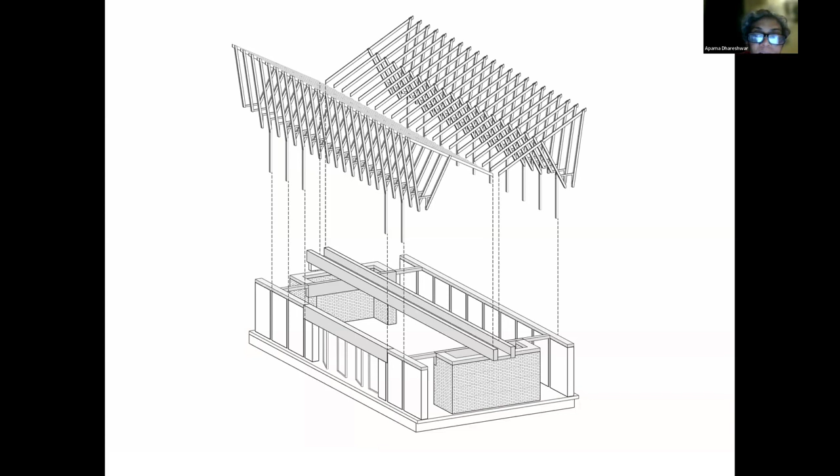So the interior spaces are a function of this outside setting. Because of this inverted roof profile, there is a very light feeling to the entire structure. Also, the inside is then very beautifully connected to the foliage outside.

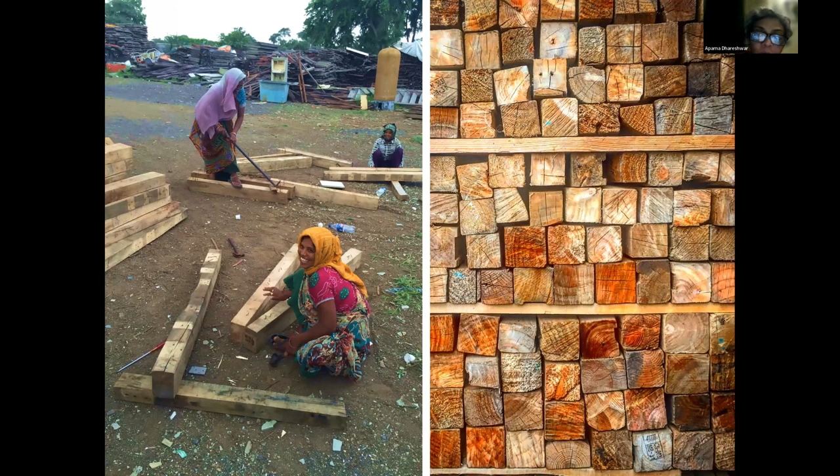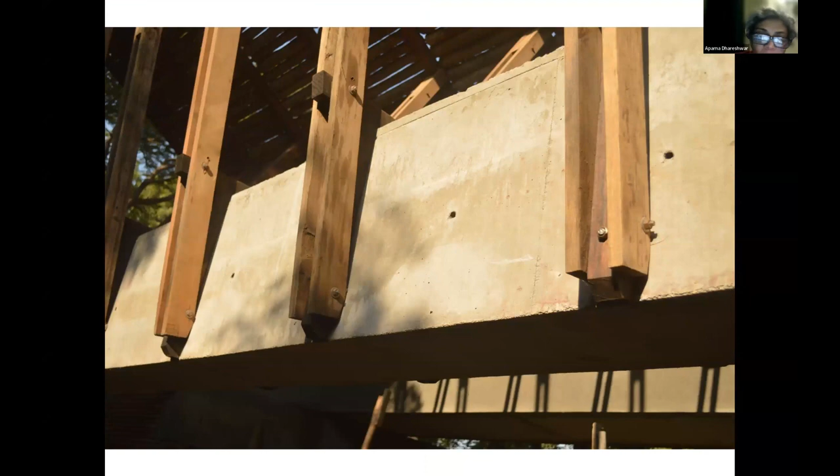This is the shipyard from where we got wood—we went and picked it up for the roof. These are how the trusses were designed, and you can see the rammed earth walls. The wood is exposed; we are not hiding anything, everything is the way it is. This is the central gutter, the inverted roof.

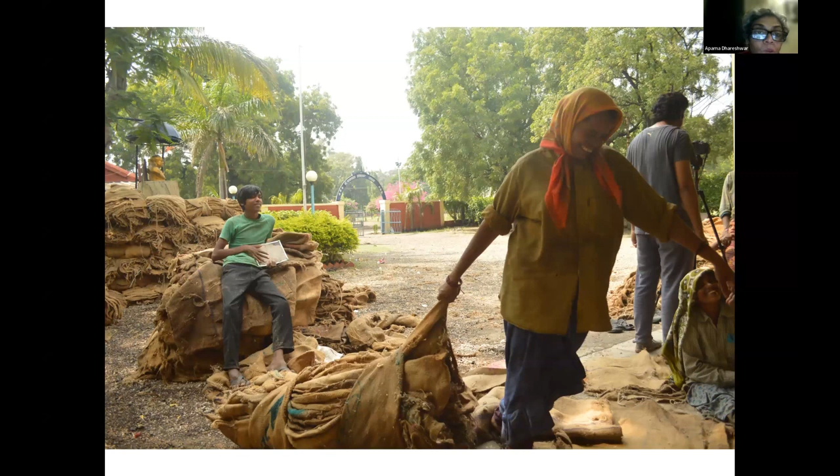This is the labor—these are the craftsmen that come in. They are local villagers in some cases, simple people who've not had formal education but have amazing talent, amazing energy, amazing vibe, using simple materials available to them. No degrees, not earning, not rich. This is not a lucrative industry, but they're happy nonetheless to be a part of this project, and it was a beautiful experience for me to be a part of it.

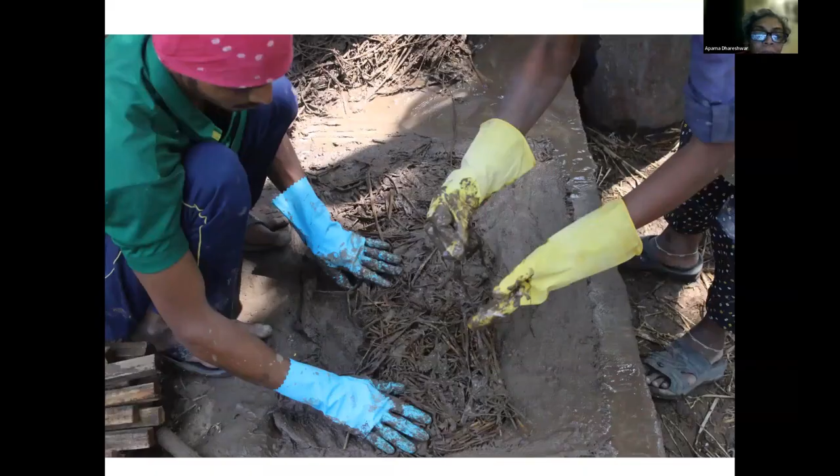The lady here is actually making mud rolls with these jute sacks. Jute is a textile material—I don't know if you're familiar with it—typically used to store rice, which farmers put in it and sell. It's a very common material in that part of the country, and these are all waste products. So what they did was fill these with mud, made mud rolls of this kind, and then covered the underside of the roof with them as insulation.

This is how the temperature works—while outside it could be 40, 45 degrees, inside it will be cooler by at least 10 degrees centigrade, thanks to the insulation from this. These are the repurposed tiles on the roof.

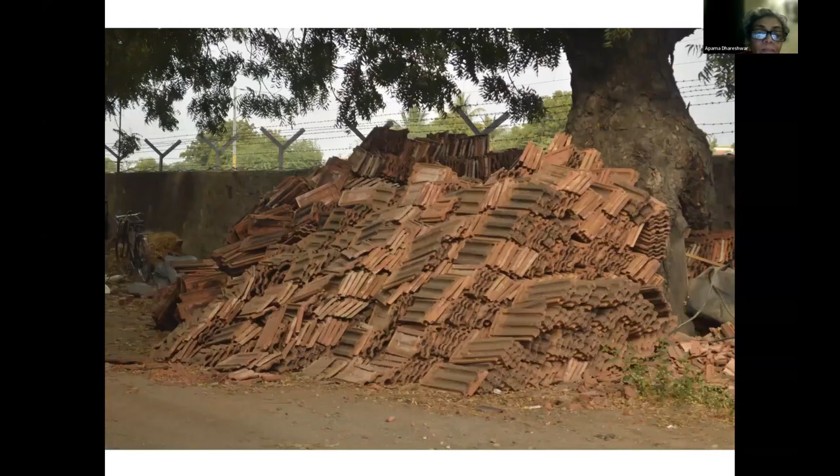These are some construction photographs. This is again testing how we want to lay the bricks. This was a lot of hands-on project.

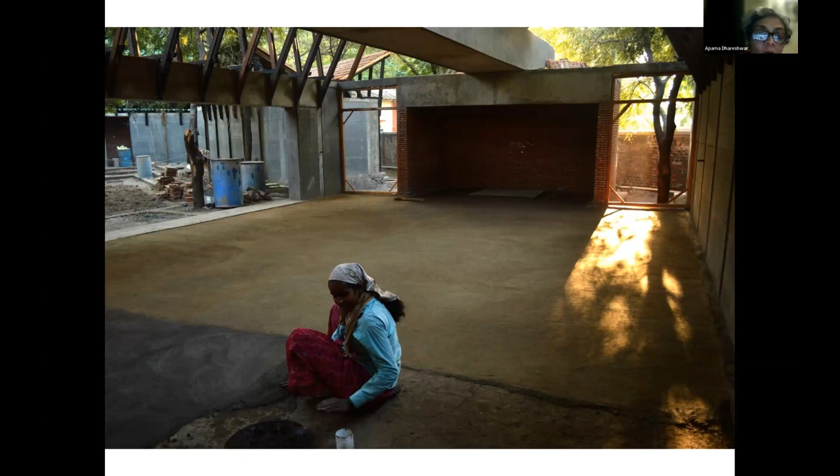The flooring is again a traditional method—a combination of mud and dung, cow dung, since cattle is available there. So cow dung and mud together is plastered on the floor, and that is your floor finish. It is also known for its antiseptic properties, and this traditional floor finish is done in a lot of Indian villages.

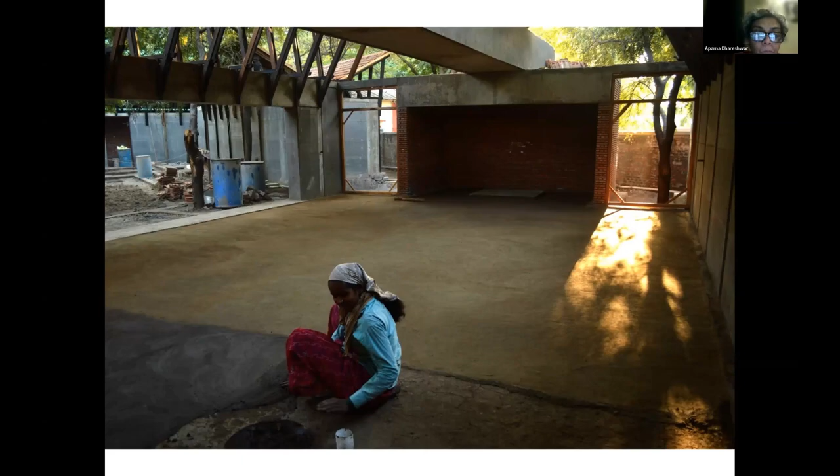And these are the images of the finished project. This is the roof, the inverted roof, and this is the gutter—the water falls in here, goes down the steps, and then we collect it.

Pedro, I have one more project. Let me know if you want me to go through it, or if we have a constraint for time. Yeah, let's go for it.

Okay, we go to the end then. So this is the last project that I'm going to run you through. It's another temple. This was our oldest project, which is why I've left it at the end.

The interesting thing is this project became very famous. We won some awards for it, and we were so excited. We thought we would get lots of temples to do after this. We never ever got a temple for the next 10, 15 years. So it was quite strange. I don't know why that happened, but yeah, it happened the way it did.

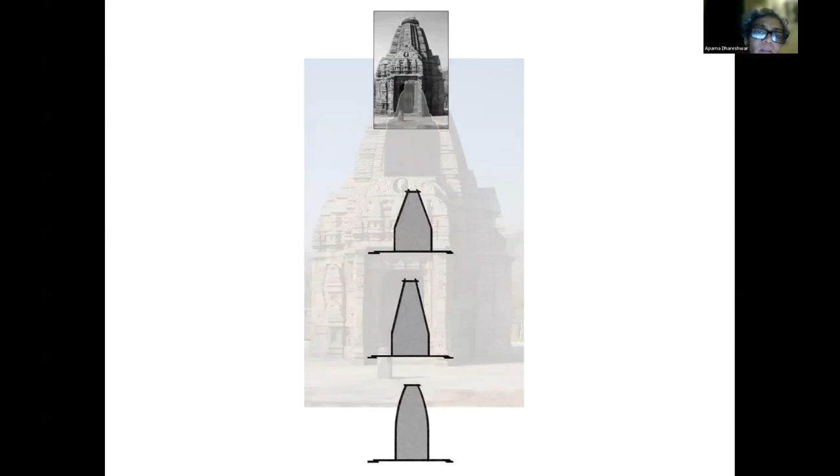So it's a Shiv temple. Shiv is the name of the deity. This is a traditional temple, and we studied the form, in section, how typically temples would be. And you can see that also echoing in the other temple that I showed you previously, the form of a temple.

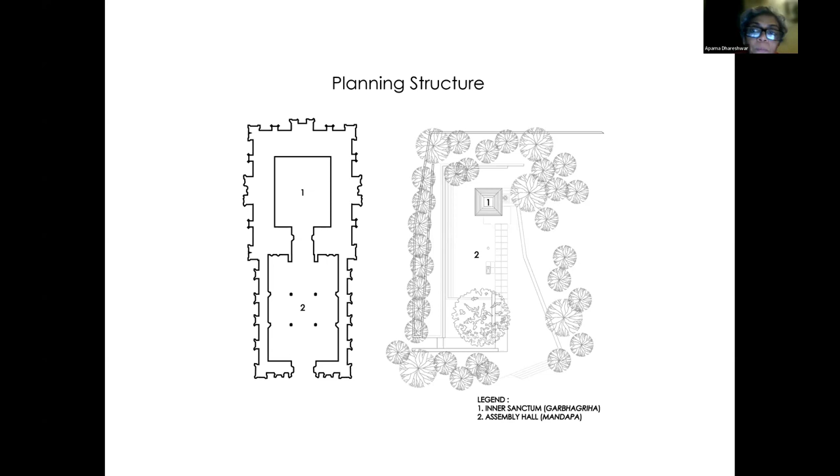This was the site. Again, a lot of trees on site. But what we thought of, we kind of said we don't want to build one structure, and we said, what if we look at the sky as the roof and these trees as the wall, and we just build this inner sanctum here. So the nature in itself becomes its architecture. We are not going to build another layer of built environment on top of that. And that was the central idea.

This is the plan. This is the inner sanctum, and we just walk along this east-west axis going towards this inner sanctum. There was a pond out here, a natural pond, which you can see in the next slide, which you can see in this section. So what we built was this inner sanctum, and we made this the assembly hall. And we said the sky is going to be the roof, and the trees are going to be its walls.

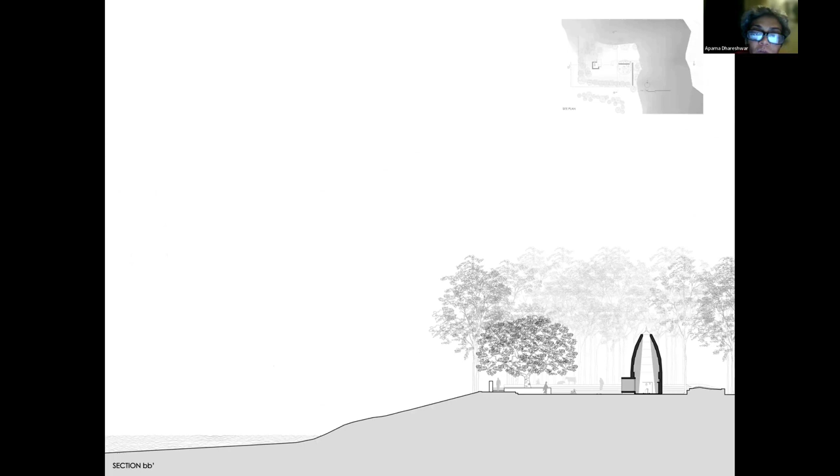The components, the threshold as the frame for the inside as well as the outside, and this amphitheater on the side - it transforms this religious typology into a hybrid cultural one, because this completely activates the space here, becomes a social space along with a religious and spiritual space.